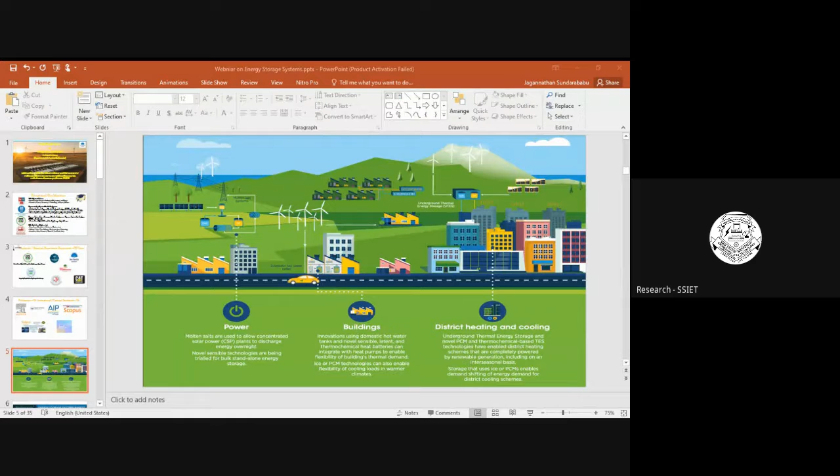So in this one, we have seen about the hydroelectric. Now we will be seeing about the title where the energy conversion will take place by the air and then flowing into the energy storage systems, and then from the industrial waste heat recovery, which has been converted over here by using this wind energy.

And then which has been converted into the domestic applications, which is primarily the first thing initiated for domestic hot water applications, from Sweden. Sweden and Denmark are the most prominent countries where energy storage applications are used for domestic water heating, that is called district heating purposes.

So in the 1950s, around 1950s, they started to work on this, which is called energy storage for household purposes, that is called domestic heating purposes.

And followed by that, for example you can see here, this is the district heating and cooling systems, where the thermal storage systems, called novel PCM, that is phase change material, and thermochemical based TES technologies, have enabled district heating schemes completely from renewable energy resources.

And this energy can be stored in the phase of ice or in the PCM, which can enable the demand of energy for district cooling schemes.

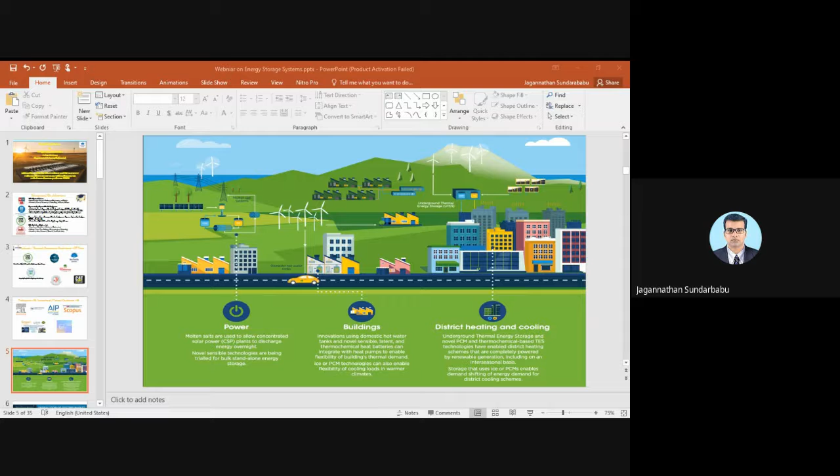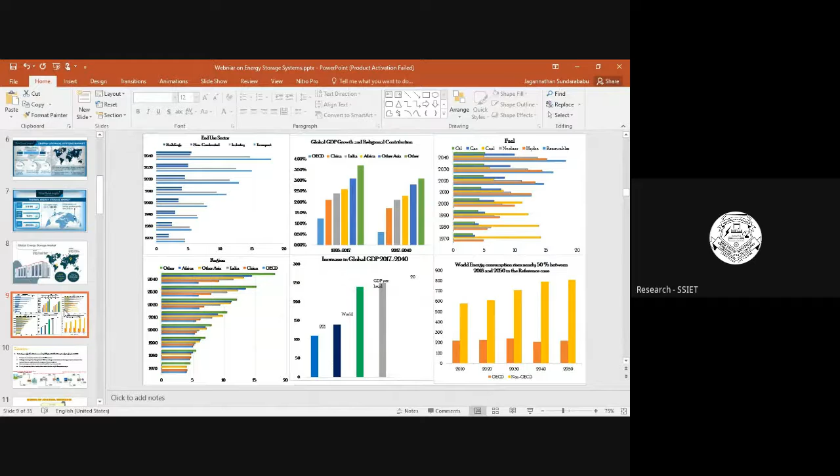Let me go. In the end user sector, you can see buildings, non-combusted, commercialized, and industry, and transport. The most prominent thing is the transportation cost of this particular energy transportation which has to be thought of. So from 1970 to 2040, the transportation cost and industry utilization cost, the energy from industries has increased, because this energy from industries can be used for domestic or residential purposes, for example smart cities, where the trend and need have been increasing day by day.

So in the case of global GDP growth and regional contribution, you can see China, India, Africa, and other Asian countries. So the demand has been increasing. From 1995 to 2017, you can see that apart from China, India, and Africa, other countries also play a major prominent role in global GDP growth.

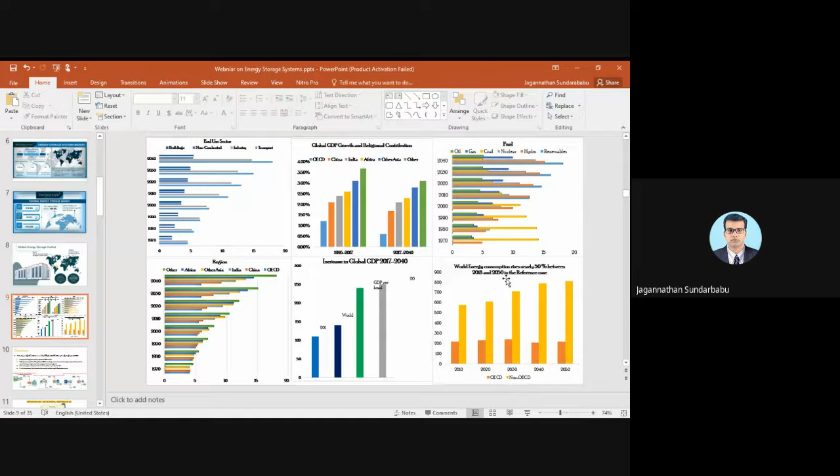So in order to overcome this energy demand in the future, there is a concept called mobilized thermal energy storage systems, where these systems will develop and investigate the heat transfer augmented M-TES container, and also design and investigate phase change material heat exchangers, for example heat or cold energy consumption, and also conduct and analyze the technical feasibility, economic feasibility of systems, and evaluate the lab scale model, and also numerical investigation using computational analysis.

For example, you can say about sensors, or maybe artificial neural networks, or maybe blockchain, or machine data. So the first primary important thing is all about transportation of energy.

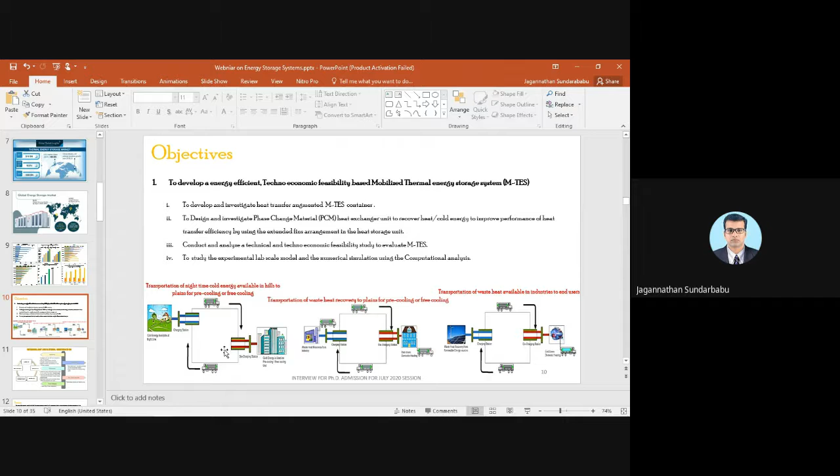So here you can see you can store the energy at night time by using a phase change material, and then transport this to a residential building. The same with waste heat recovery from industry, which can be transported to domestic users. And waste heat from solar can be transported to industries. So this is a cyclic process involving these processes and renewable energy.

These are the methodology and material identification needed to have good energy storage capacity of a material. First, selection of material is important. For example, you have to ensure the thermal stability of a phase change material.

Phase change is nothing but changing of phase from one form to another, for example solid to liquid or liquid to solid. It depends upon the application and the material. You have to study the properties of the particular material to understand its characteristics. So first, the initial step for material selection is to ensure thermal stability is appropriate and thermal conductivity is appropriate, and also study the characteristics.

You have to go with differential scanning calorimetry, Fourier transform infrared study, and thermogravimetric analysis. These are the prominent things which come under this material study.

And then the component study. Component means you have to decide which component you are going to use, whether it's going to be a tube, a horizontal tube with numerous fins, vertical tubes, a cylinder, or a shell. This study has to take place, called heat transfer study, with respect to the material, the component, and the design, which will give you better augmentation.

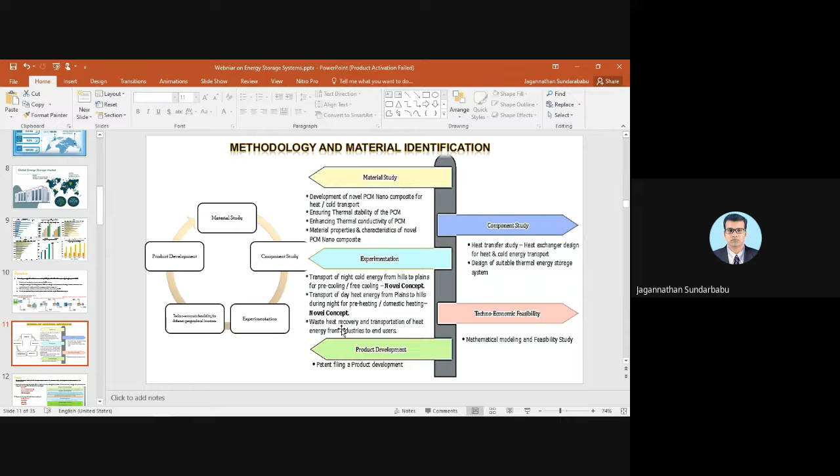And also a techno-economic feasibility study, or mathematical modeling. Finally it comes to product development - after completing all the study on materials, component, experimentation, and economic feasibility, it comes to product development, to check whether this particular material is good for the market and stores a good amount of energy. These are the things people working on energy storage have to think of.

So the scope for this energy storage is all about having a material study, component design, system integration, and studying techno-economic feasibility, for how much it can be used for commercialization. For example, a product has to be developed.

Here you can see the required technologies - what is the material function, how it behaves, and you have to design a heat exchanger, and what are the heat transfer and thermal properties of it. And what is the technology which targets, and then what is the product which you have to aim for.

And also what is the market need, and what are the product highlights - for example, whether it will be feasible for a particular temperature. So you have to find the places where this particular developed product can be used.

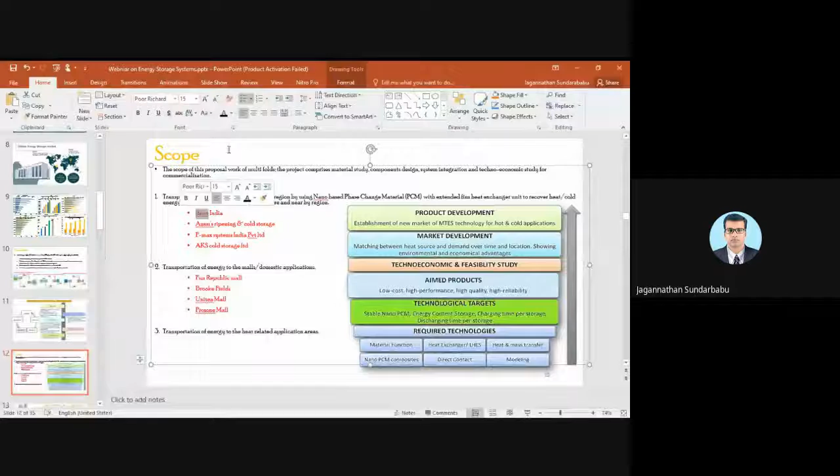These are some identified transportation energy storage systems where in future it can be incorporated - for example, Forest India, Anu Ripening and Cold Storage, F-max Systems India Private Limited, and AKS Cold Storage Limited. So these are a simple basic scope for these energy storage systems for research purposes.

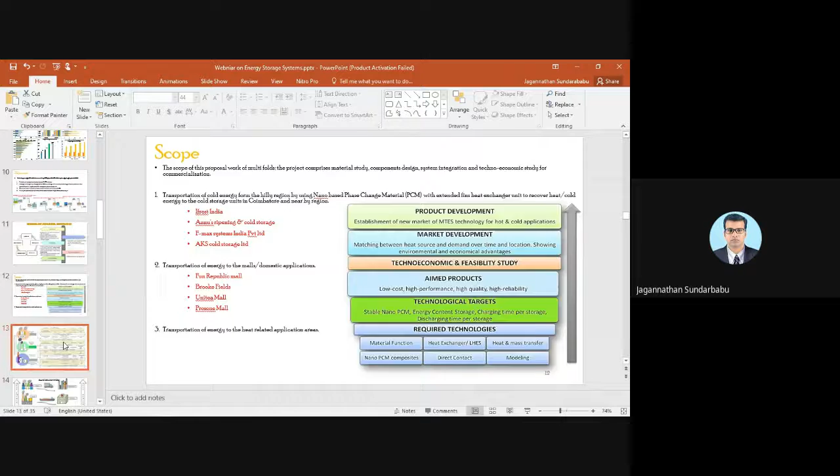So in this energy storage study, first is all about an industry in Japan, the factory of Sanyo Electric Private Limited. The particular process is all about surplus condensation heat, that is waste heat, which is converted into preheating feed water to the boiler, and the end user is the factory of Furukawa Sky.

Aluminium Corporation Limited. The other one is a sewage plant, where the heat amount of unused gas from the sludge incinerator is created, and that is used to supply hot water to the absorption chiller, generating cool water for air conditioning systems. The end user is the civic gymnasium.

And the sewage case, it's collected from Kagaya factory of Kurimoto Limited, which is in Osaka City, which has waste gases from the annealing furnace, and it is transferred to heat water for the bath of employees.

And in the case of Transheat Germany, this is a German based industry where waste incineration plants, called sorption storage systems, and the end user is an aluminum factory.

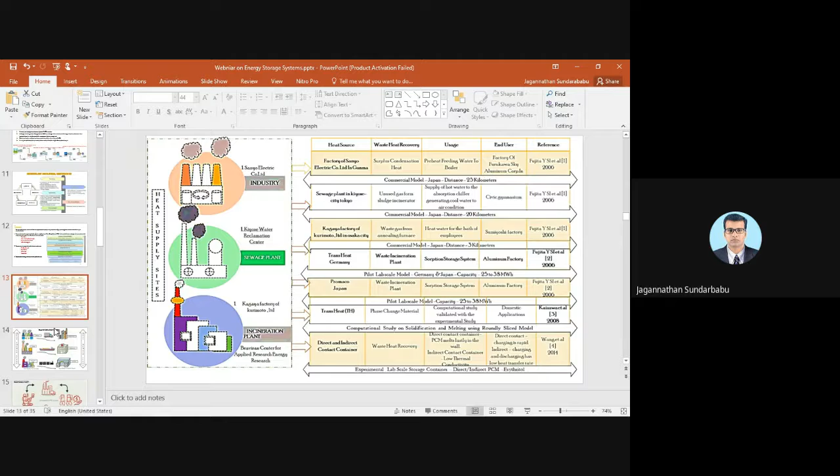So here you can see the transportation systems. From the industry, industrial wastage has been transferred to residential purposes through transportation systems. And by using the sewage, the wastage from the sewage has been transported to domestic applications, where you can see the heat source sites.

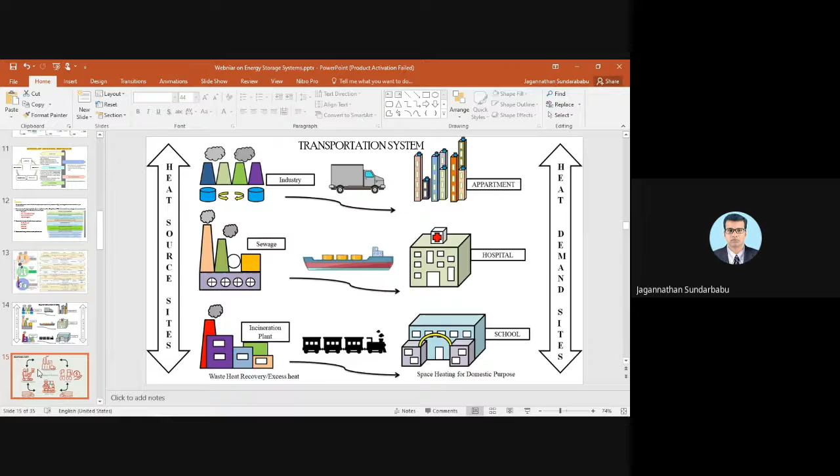This is the source where the waste heat energy, which is called industrial waste heat recovery, is used for different heat demand sites, where the usage of thermal energy is highly needed. And in the case of economic study, you can see the centralized waste heat recovery systems.

If you go for an economic study, you have to know the production capacity and the heat release rate - for example, how much amount of heat is being released. For example, if they are producing steam, what is the cost of it.

So how much amount of heat can be transferred for transporting from one place to other places - for example, if you're going to transport the waste heat recovery from industry to the end user, what is the distance between the end user and the heat source side. If I transport for two trips or three trips, how much amount of energy is required for that particular industry to the domestic, or vice versa.

So you have to calculate the cost, including the transportation and the heat release rate, and the fuel price for this transportation, which comes under the transportation cost. And that we have to calculate along with the labor cost and the production cost.

So this is how the economical feasibility or economical study will be made. This type of economic feasibility can also be done using the operational cost.

By operational cost, for example, it will include all about the transportation cost and the cost of heat release from the industry. You have to pay some amount for this particular heat recovery, and that comes under the operation cost.

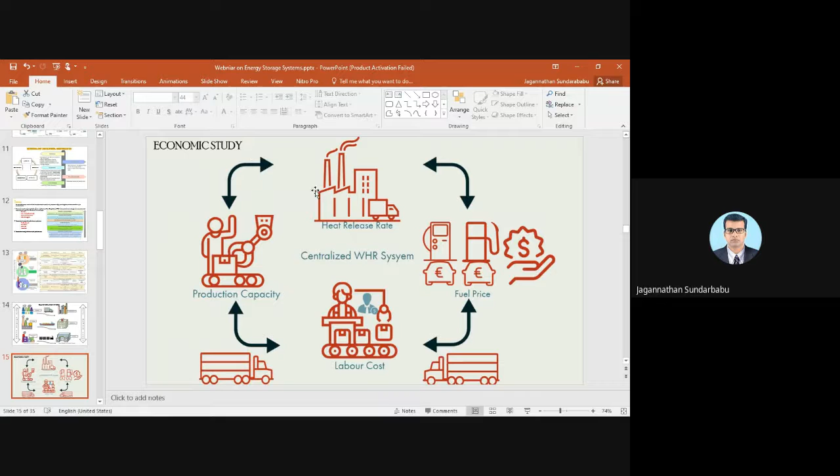So this study on economical M-TES, that is mobilized thermal energy storage system, requires experimental study, numerical study, computational study, and also an economic feasibility study in order to implement it in the market.

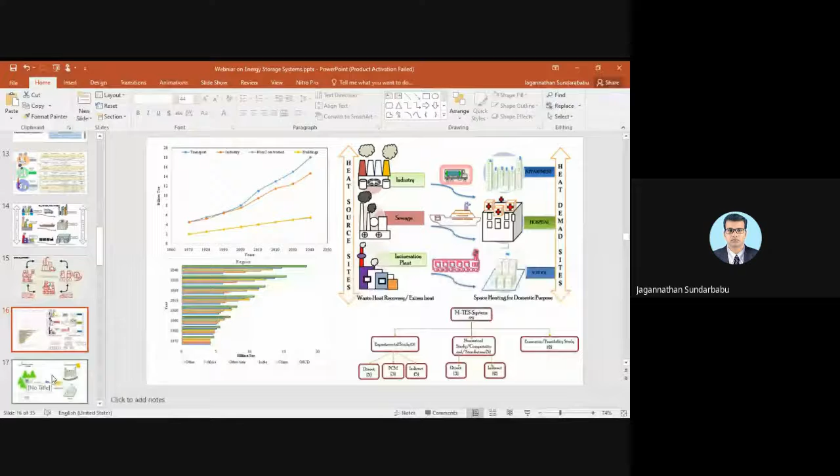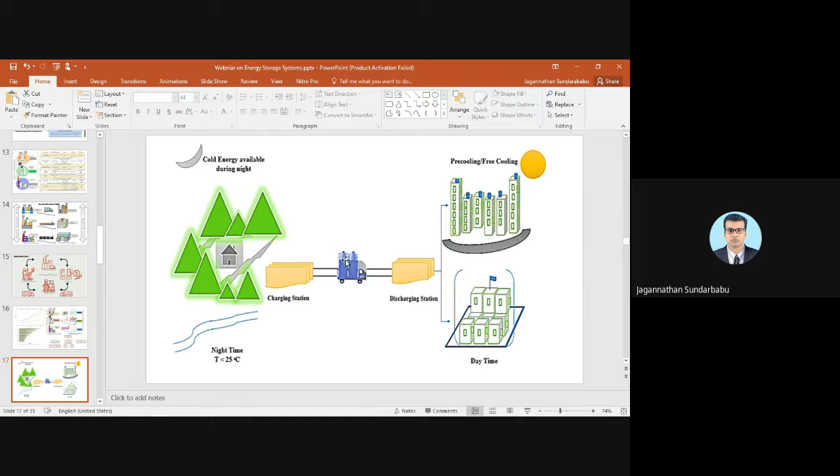In that heat exchanger you have the energy storage material. The main challenge is all about how much time is required for charging that particular vehicle, meaning in the case of a particular PCM, or phase change material. So how much charging time has to take place, and what is the thermal conductivity - these are the two major challenges in the case of energy storage.

But the scope of this energy storage is to augment heat transfer by increasing the container area or providing fins on both the outer and inner tube surface. This is the scope - how, compared to the previous system, you can augment, meaning enhance, heat transfer, and how to reduce the charging time. These are the main challenges and scope of this energy storage system.

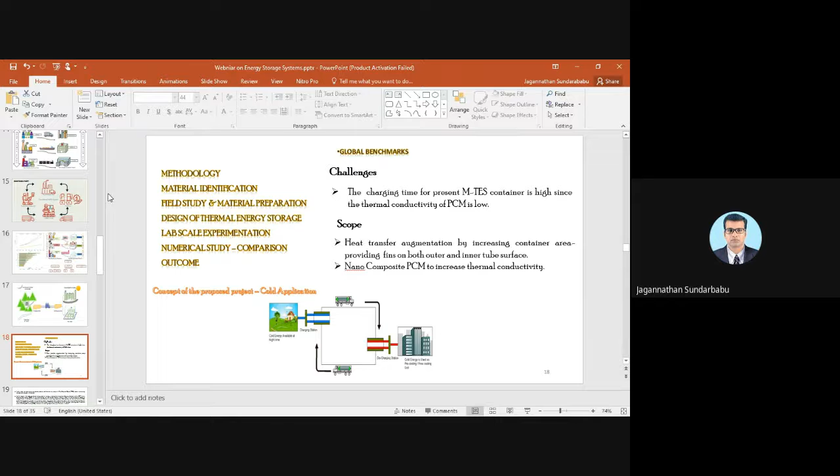Also, in the case of novel phase change materials, you have to think of nano composite materials in order to increase the thermal conductivity. So this is a small study of energy storage systems, in the case of cold applications.

An investigation on thermal conductivity using polyethylene glycol is carried out. In this, to study the material properties and characterization - thermal conductivity, differential scanning calorimetry for heating rate, and thermogravimetric analyzers for change in mass as a function of increasing temperature - the characterization of polyethylene glycol has been carried out to explore the properties and insight of the material.

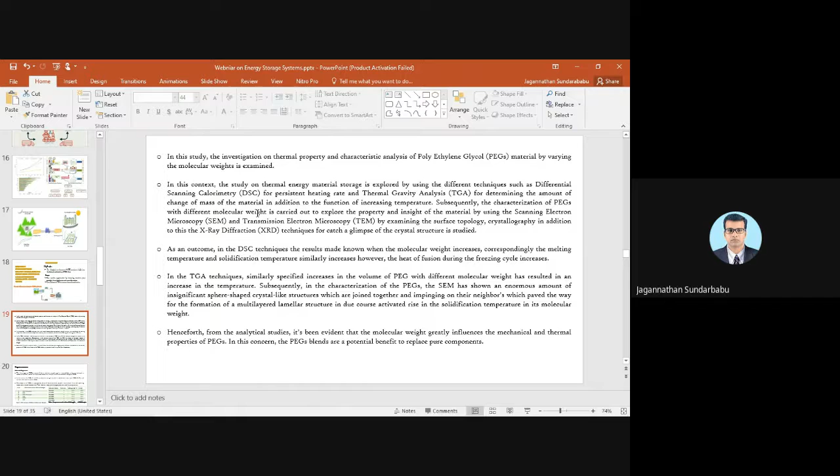This is done by using scanning electron microscopy and transmission electron microscopy, carried out to study the surface topography and crystallography of the selected polyethylene glycol material for hot applications, and also to study the crystal structure. X-ray diffraction study is also carried out, where you can see here.

This is a small study on hot application where six different PEGs with different molecular ratios have been taken for the study, and PEGs of six different molecular weights, in which two remain pure PEG Exi plus, and the leftover four will be the normal PEGs, and this type of PEG is equipped mixed with polymeric constituent, with melting temperatures of 54, 49, 54, 57, 55, 62.

These are the melting temperatures with a heating cycle of one heating cycle, where you can have a clear picture of the melting temperature of the particular polyethylene glycol.

You can see that PEG Exi plus with 3350 and 6000 will have a prominent, comparable value of 54.47 and 54.78. These two values are approximately similar when compared to the other four normal PEGs.

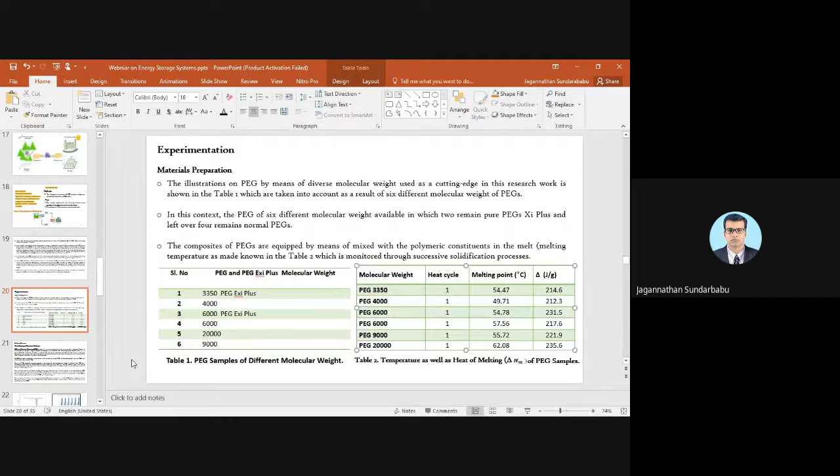In the case of DSC scanning, that is differential scanning calorimetry, a heating cooling rate with an active methodology is incorporated, where samples have been taken with different molecular weight ratios, all about 2 to 4 milligrams of weight, employed in aluminum pans for the differential scanning calorimetry process.

With different heat cycling, heat systems with 1, 2.5, 5, 10, and 20 Kelvin per minute are the functional parameters which have been incorporated.

In this experiment the inert gas argon is used to determine the flow rate of 30 centimeter cube per minute, subsequently regularly monitored and regulated by mercury and indium standards.

For the initiation of cooling, liquid nitrogen of 50 ml per minute has been utilized as a cooling medium.

This sequence of six different molecular weights of PEG, with two pure Xi plus PEGs and the rest normal PEGs, shows that Xi plus PEGs have a maximum melting point of 58.15 and 59.48 degrees Celsius, whereas in the normal PEGs you see melting temperatures ranging from 56 to 66.59 degrees Celsius.

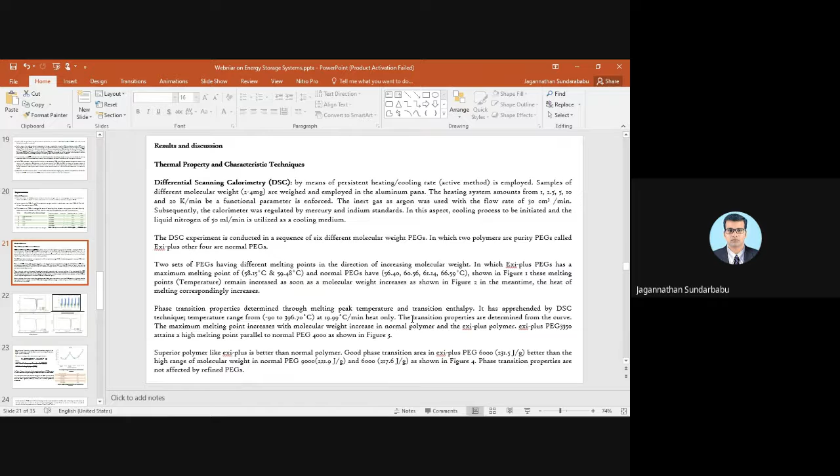To determine the phase transition of these PEGs, the temperature range of 90 to approximately 400 degrees Celsius at 19.9 degrees Celsius per minute of heat was used, which gives transition properties for the determined curve.

For example, the superior polymer like Xi plus is better than the normal polymer because it can give a good phase transition area for polyethylene glycol 6000, which is about 231.5 joules per gram, giving better properties with respect to molecular weight.

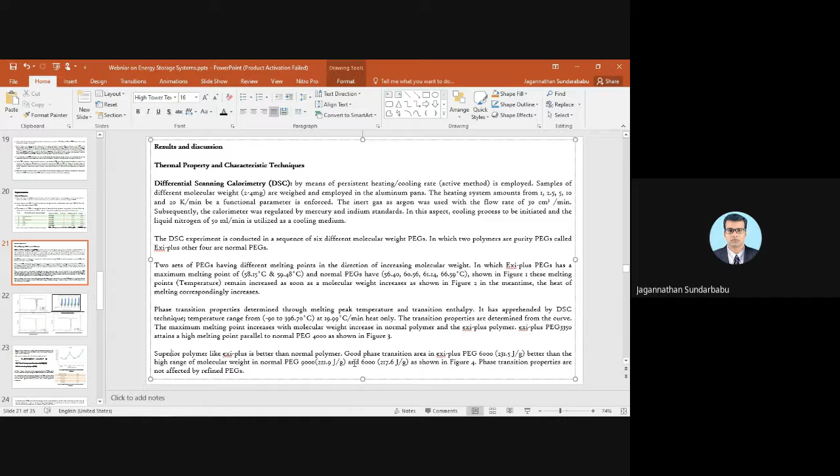For example, PEG 9000 and PEG 6000 - this PEG 6000 has shown better properties compared to the other PEGs.

This is the graph obtained from the various thermal analysis tests, showing the differential scanning spectroscopy of different molecular weights of PEG.

The PEG has been incorporated with different temperatures, with a heat cycling of one cycle, with different volume fractions.

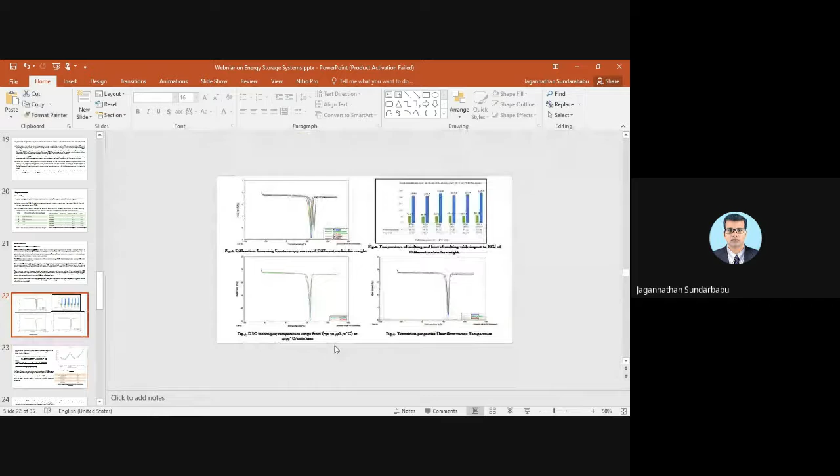The heat of melting for different polyethylene glycols has been calculated for different samples, and differential scanning calorimetry techniques were carried out with different ranges from 90 to 200, up to 396.7 degrees Celsius, with a constant heat rate of 19.99 degrees Celsius per minute.

You can see the heat flow transition properties, heat flow versus temperature, where the temperature drops drastically, which is called the latent absorption rate.

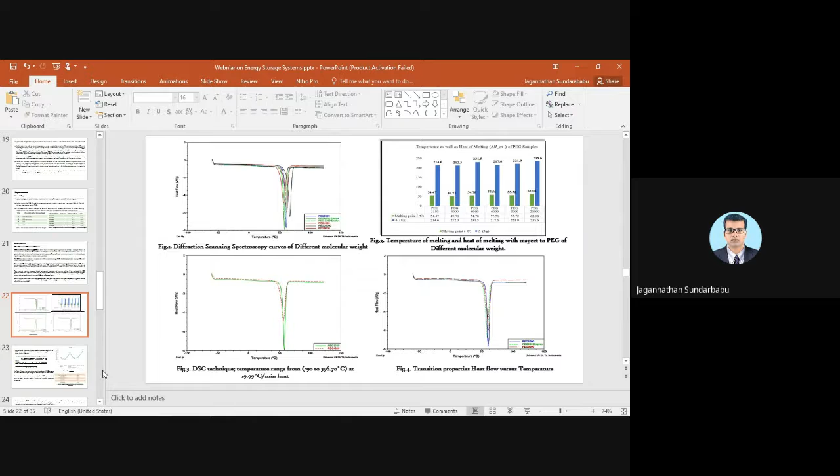To identify the crystallization, these are material studies showing how the material is feasible, whether it has good thermal properties and thermal conductivity.

In the case of crystallization study, crystallization formation is stronger when the molecular weight of PEGs is higher. So when you increase the molecular weight, the crystallization becomes stronger compared to the 3350 Xi plus molecular weight PEGs.

As is known, the molecular weight of PEG increases, resulting in increased development of crystalline phases, which is associated with lower segmental mobility. So these are the crystallinity studies, where it is clear that when there is an increase in molecular weight, the heat of melting is good, and it shows better properties compared with lower molecular weight.

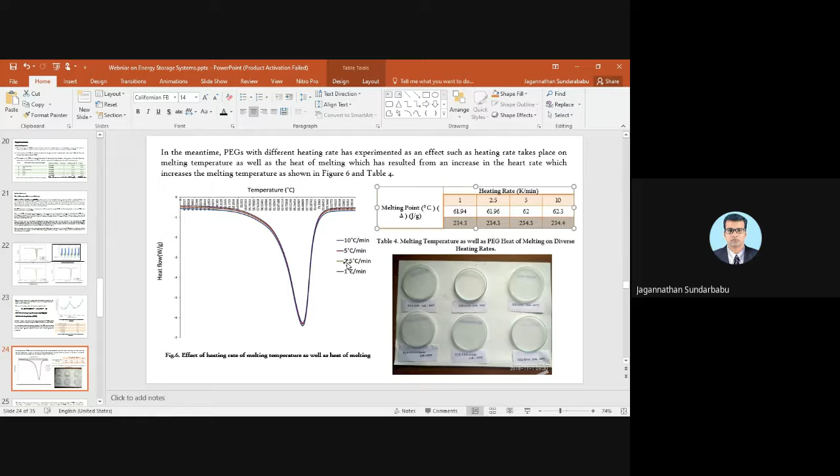So the effect of heating rate on melting temperature, as well as heat of melting, where you can see 1 degree Celsius, 2.5, 5, and 10 - this is called variation in the degrees used. So with respect to that, the material transformation takes place.

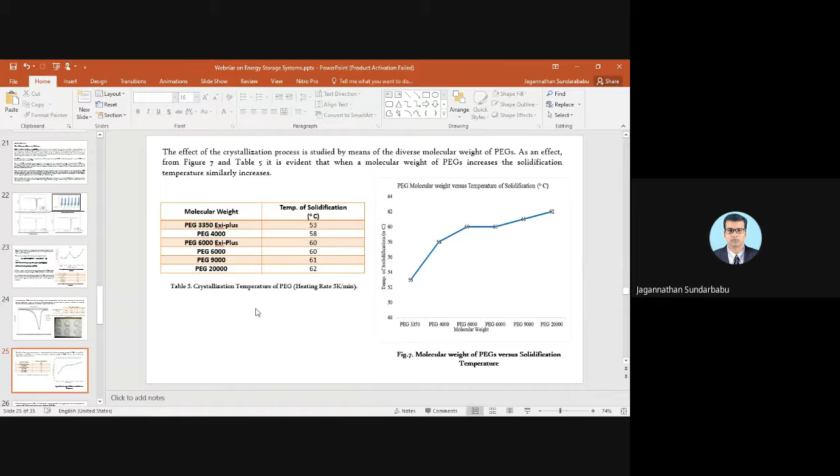The heating rate is about 5 Kelvin per minute for this particular material.

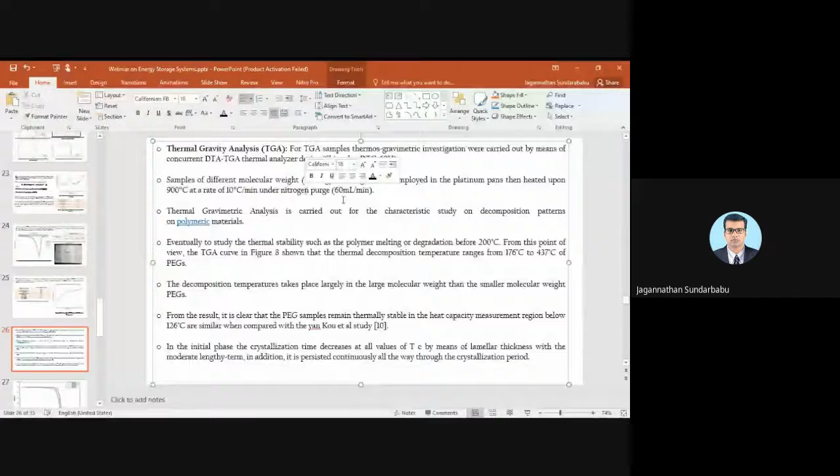The degradation process has also been carried out to find the thermal stability, where the polymer melting or degradation should occur before 200 degrees Celsius. From the TGA study, it's been shown that the thermal decomposition temperature ranges from 176 degrees Celsius to 437 degrees Celsius for PEGs - this is the range of thermal decomposition for polyethylene glycols.

The decomposition temperatures largely depend on molecular weight compared to smaller molecular weight. From this TGA, it has been shown that the PEG samples remain thermally stable in the heat capacity measurement region below 126 degrees Celsius, so it becomes stable below that temperature.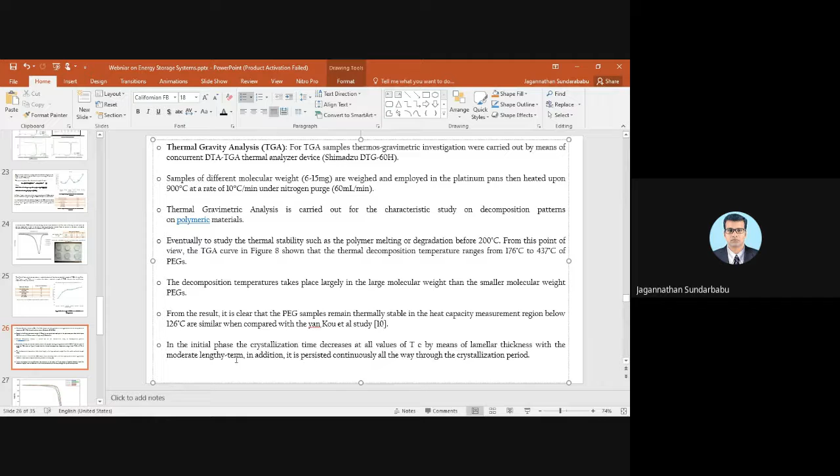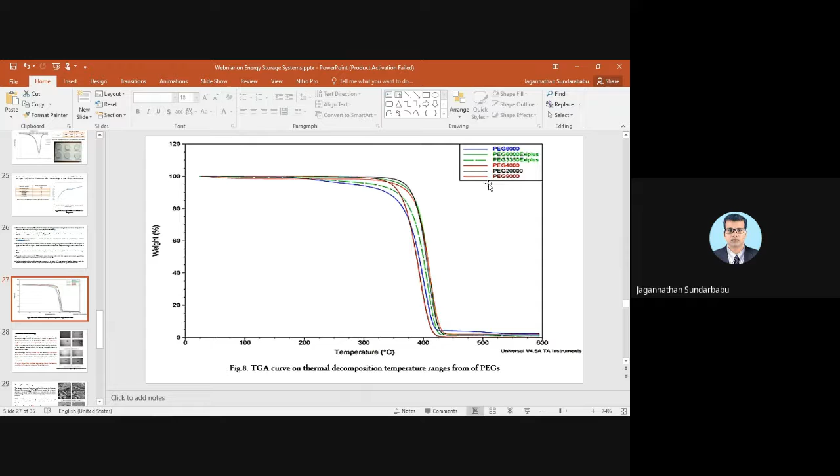This is the thermal gravimetric analysis decomposition curve, where you can see at about 397 degrees Celsius the temperature drops. This has been characterized for different PEGs.

In the case of characterization, transmission electron microscopy was carried out, showing different microstructures. For example, we took a prominent structure of 3350 and 6000 PEG. Comparing these two molecular weights, 3350 showed better properties, such as voids like air bubbles, which you can see here.

With the nanometer range of 200, and at the 500 nanometer scale, it's evident that the voids are much smaller compared to the 6000 PEG. Correspondingly, in the 6000 PEG, the voids - that is the air bubbles - have been shown in the figure. So both 3350 and 6000 PEG show an air bubble, which is the air bubble observed from the surface topography, as seen from the transmission electron microscopy results.

So it has been clear that there is a potential for voids, which may be caused by heating rate and heat of fusion of particles. These are the two possible ways of formation of these voids, maybe the heating rate or maybe the heat of fusion of particles.

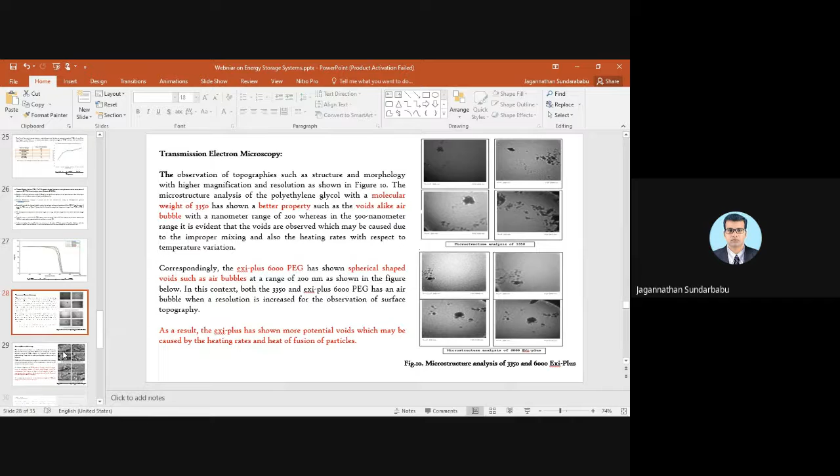So when you go with scanning electron microscopy, to identify the topography of the PEGs, you can see that samples of higher molecular weight have an enormous amount of small sphere-shaped crystal arrangements. So if the molecular weight is higher, you can see an enormous amount of small sphere-shaped crystal structure, and also fusing or impinging of material has taken place.

So from the figure you can see this is called fusing, or you can say impinging, on the neighboring particles. That could pave the way for the formation of a multi-layered lamellar structure. You can see the lamellar structure here in the case of scanning electron microscopy analysis.

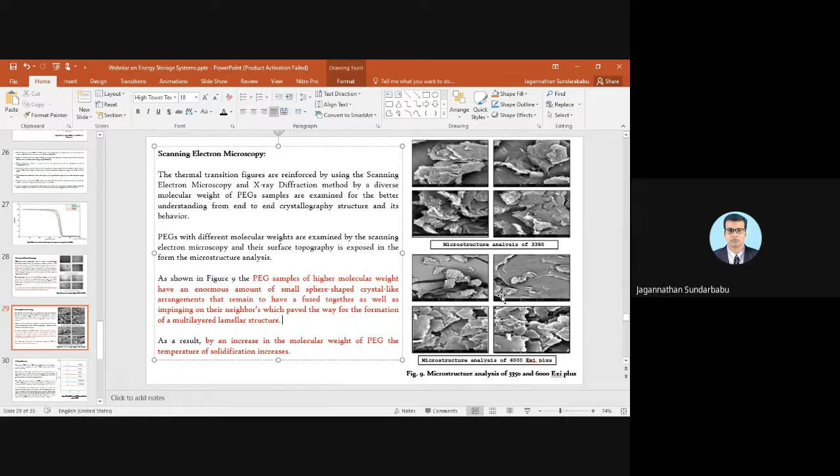And as a result, it has become clear that an increase in the molecular weight of the PEG increases the temperature of solidification. The same criteria which we have been seeing in differential scanning calorimetry. So this is the X-ray diffraction curve, where you can see that the intensity has been increasing.

When there is an increase in intensity, the polyethylene glycol with a higher molecular weight has shown a more prominent, or enhanced, way of thermal conductivity. You can see that Exiplus samples have less intensity, which is in the range of 3000, 3133.33 for Exiplus 3350, and 4160 for Exiplus 6000.

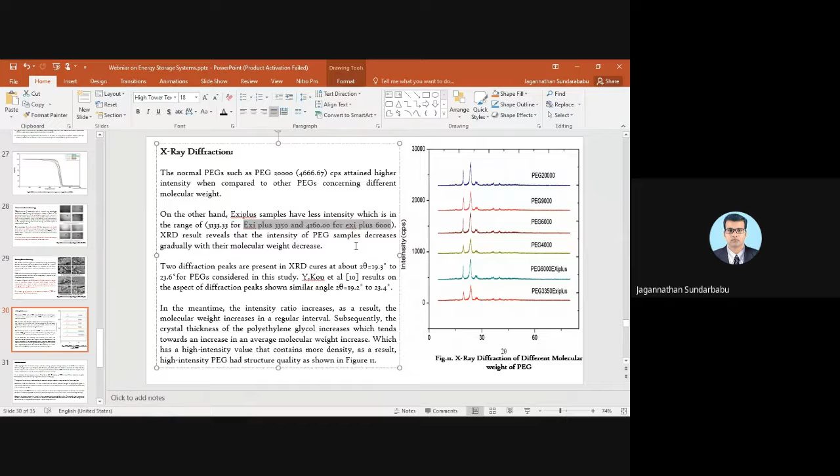These two samples have shown better properties compared to others, so we have taken this property to the next level—these two proper materials, polyethylene glycols, can be incorporated into the heat exchanger for heat storage application, where heat has been recovered from waste heat recovery.

For example, you can see a plant where an industry produces a high amount of heat energy, waste heat, that can be utilized in the form of stored PEGs, and transported to a vehicle where the heat energy is required, for example in the case of district heating, which is for water heating purposes.

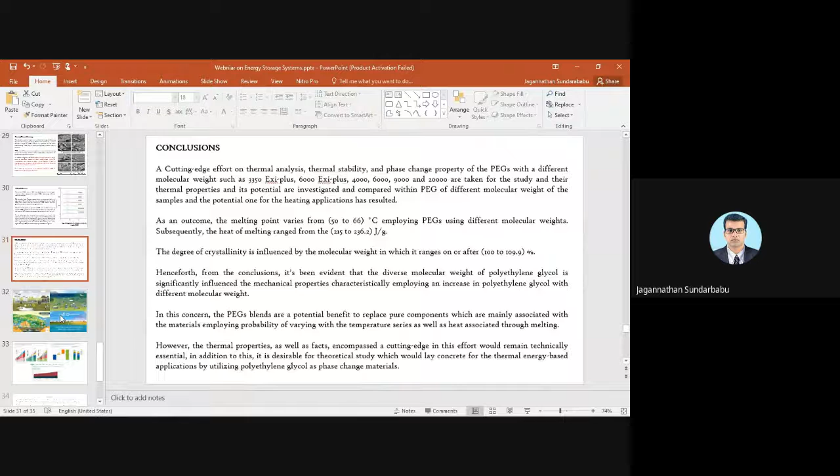And the cutting-edge effort of this thermal analysis, thermal stability, and phase change property of PEGs with different molecular weights has shown that these PEGs with 3350 and 6000 can be used for potential energy storage applications, in the future energy storage sector.

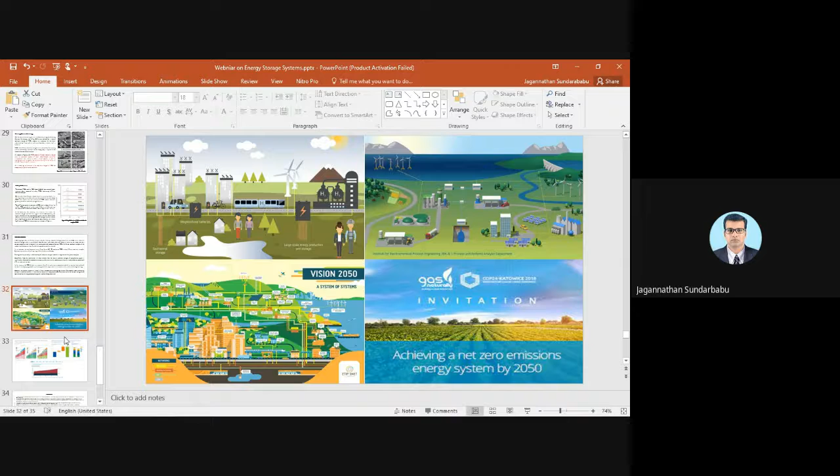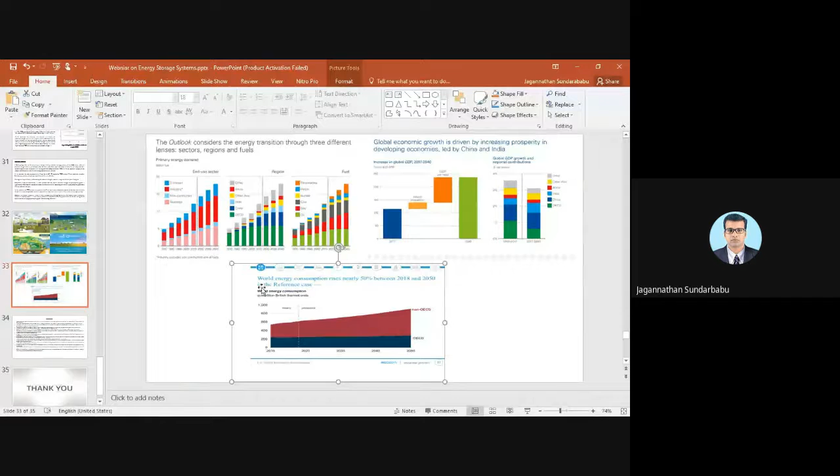So from this graph you can see that the increasing trend shows that the energy sector will play a major role in living spaces. These are some references from where the sources have been taken.